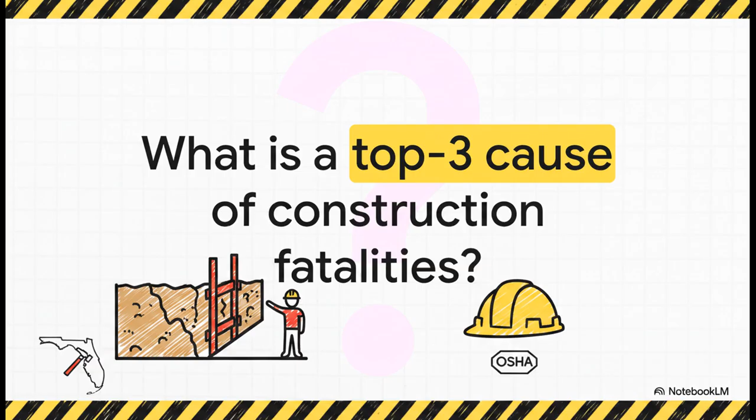But hey, before we break ground, I want you to consider this. What single event is a top 3 cause of job site fatalities and, obviously, a massive focus for OSHA enforcement? Think about it for a second. It's trench collapses. And honestly, this perfectly highlights why knowing the precise numbers behind site management isn't just about passing a test. It's literally about saving lives.

So we're going to tackle this in 5 distinct phases. We've got site layouts and plans, soils and earthwork, concrete and masonry, wood and metal framing, and finally, those absolutely crucial OSHA safety rules. Let's kick things off with Section 1, Site Layouts and Plans.

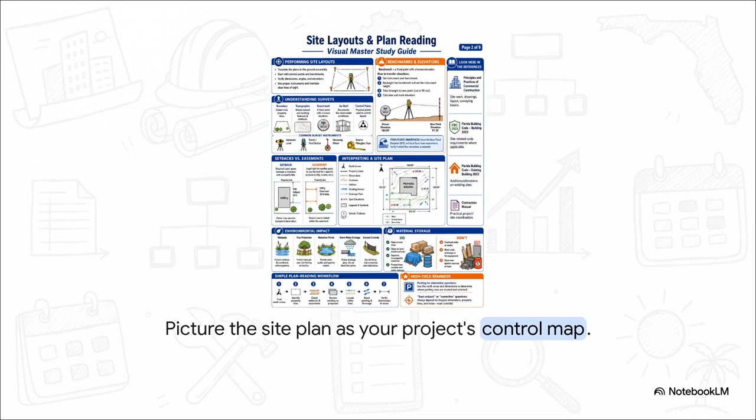Every successful project actually starts way before a shovel ever hits the dirt. Think of the site plan as your project's master control map. Being able to interpret setbacks, easements, and grading arrows, that dictates exactly where your work goes. A setback is just that required open distance from a property line, while an easement, well, that gives another party legal rights to use part of a land for things like utilities or drainage. Make a mistake here, your entire project could shift completely out of compliance.

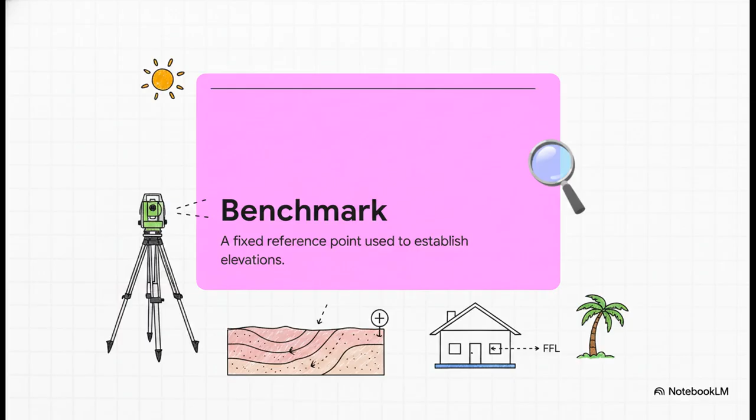Now, the absolute most crucial point on any site plan is understanding your benchmark. This is your permanent reference point, your known elevation. If you get this single elevation wrong, your entire project's elevation is completely ruined. Think about it. Every finished floor, every drainage path and grading slope relies on this one fixed point. No pressure, right? Moving right along to Section 2, Soils and Earthwork.

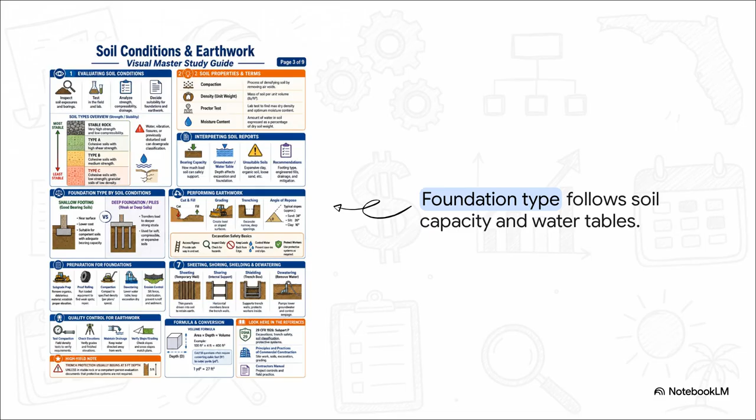So the capacity of the dirt actually dictates the foundation you're going to build on. It's a direct relationship. Especially with Florida's notoriously high water tables, soil conditions dictate everything. Got good bearing near-surface soil? Great, you can use shallow footings. But if you hit weak soils or high groundwater, which usually means heavy dewatering to keep your excavation dry, you've got to transfer those loads way deeper to stronger strata using piles. Ignoring this? That leads to settlement, cracking, and complete foundation failure. We definitely don't want that.

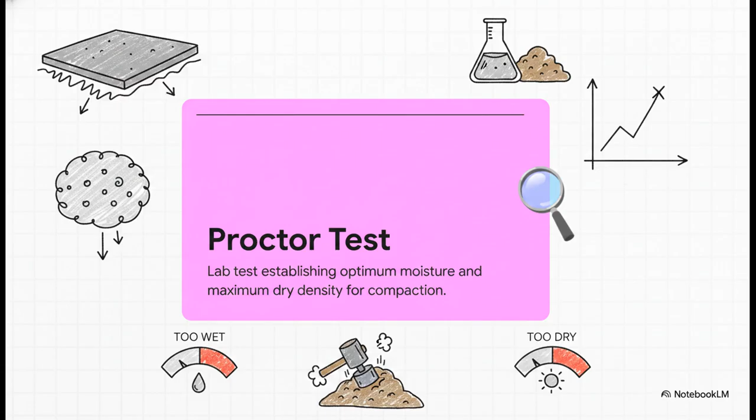To prevent that shiny new slab from settling or cracking, you have to compact the soil, right? You got to get those air voids out. But how do you actually know when you're done? Well, you rely on the Proctor test. This is a lab test that gives you the exact optimum moisture and maximum dry density targets. So when you're out there sweating in the field, your compaction efforts are constantly being measured against this lab-tested Proctor target. If it's too wet or too dry, your compaction just fails. Simple as that.

And hey, when you're estimating earthwork, please avoid this classic trap. You always have to distinguish between the loose volume of dirt you just dug up, that's the loose cubic yard, or LCY, versus the compacted volume you're placing back down, the compacted cubic yard, or CCY. Remember, dirt swells when you dig it up, and it shrinks when you compact it. Those two volumes are literally never identical. Don't let that catch you off guard.

All right, Section 3, Concrete and Masonry. With our site properly compacted, it's finally time to pour the foundation and go vertical. Now remember, fresh concrete is a live load hazard. You absolutely must follow this strict sequence: plan, deliver, place, consolidate, finish, and cure. It's non-negotiable. Your formwork and shoring have to resist immense lateral pressure during placement before that concrete even starts to cure. If you rush the consolidation or mess up the curing process, which is all about moisture retention and temperature control, your entire structure is compromised.

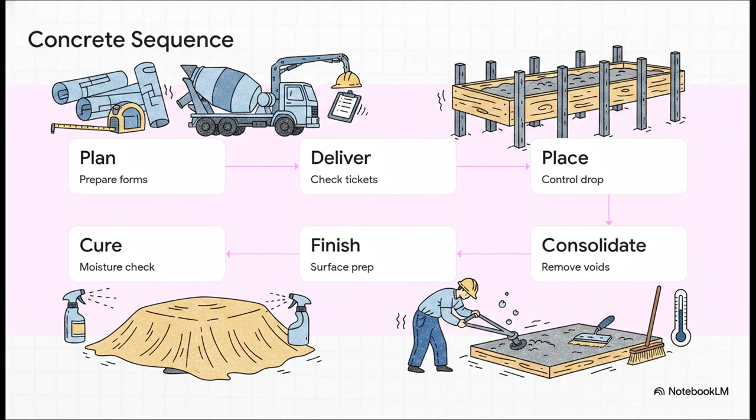And while we're on the topic of placing concrete, here is a highly tested rule for you. Fresh concrete must never free fall more than 3 feet. That's about 1 meter. If it drops further than that into a form, the heavy aggregates will literally separate right out from the paste, completely ruining the mix. So you've got to use chutes or tremies for those deeper pours to control that drop. Now, when we transition from pouring concrete to stacking masonry blocks, do not confuse your materials.

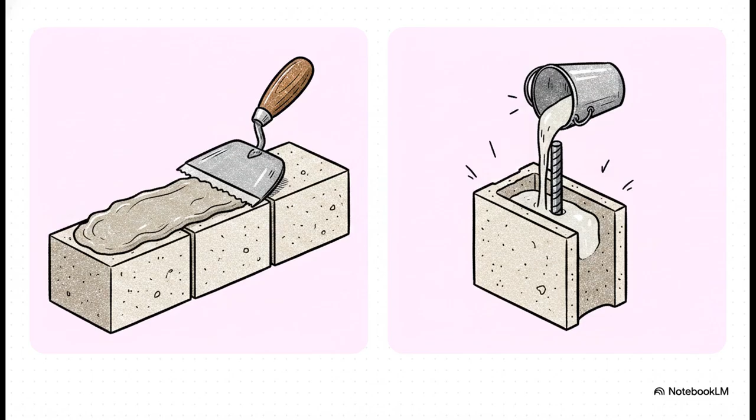It's an easy mistake, but a big one. Mortar is what actually glues and bonds those masonry units together. Grout, on the other hand, is a highly fluid material. It gets poured into the inner cavities or cells of the blocks to surround and lock in that steel rebar. So yeah, they look similar, but they serve completely different structural purposes.

Next up, Section 4, Wood and Metal Framing. Okay, now we're ready to really build out the skeleton of this structure. Take pre-engineered metal buildings, or PEMs. These are manufactured designed systems, and they require incredibly tight coordination. I'm talking anchor bolts, temporary bracing, MEP penetrations. Every single thing has to align perfectly during erection.

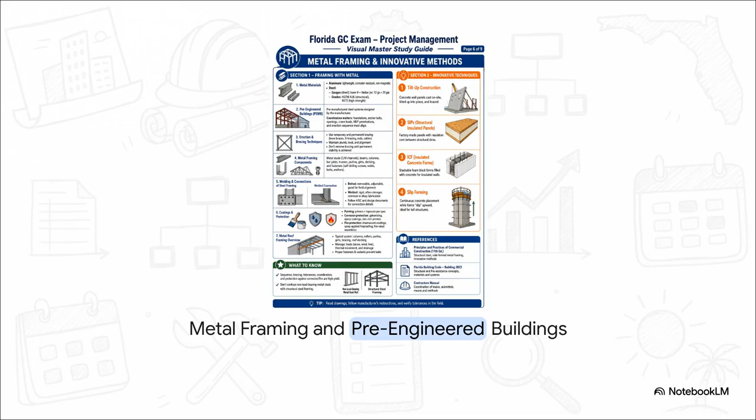And here's the kicker. You absolutely cannot remove any temporary bracing, like knee braces or cables, until the permanent stability of the frame is 100% achieved. No shortcuts. When you're ordering cold-formed steel framing or metal decking, you've got to remember this kind of counterintuitive rule. Gauge is the metal thickness designation, right? But a lower gauge number actually gives you a thicker, stronger piece of metal. It feels backwards, I know, but a 12-gauge piece of steel is significantly thicker than a 20-gauge. Keep that straight in your head.

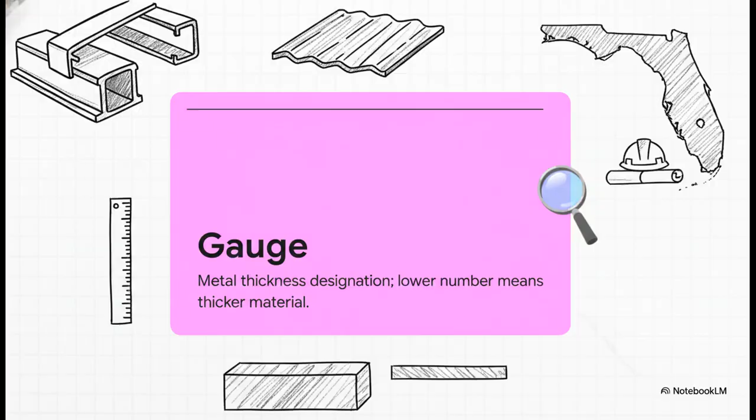Now for wood structures, the logic shifts just a bit. You have to establish a continuous load path that transfers forces from the roof all the way down straight into the soil. In a place like Florida, this means using hurricane ties between the roof framing and the walls to fight off severe wind uplift. Oh, and a huge rule here, strict truss handling. Never, and I mean never, alter, cut, or modify engineered roof trusses without official authorization from the building designer.

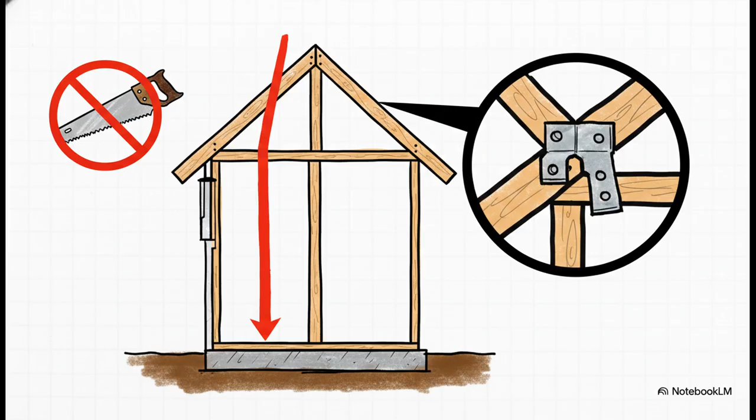Just don't do it. And finally, Section 5, Crucial OSHA Safety Rules. So, we've built a structure, but honestly, none of that matters if the job site gets shut down, or worse, someone gets hurt. Think back to that opening question about fatalities, right? Well, the magic number for excavation safety is 5. Any trench that is 5 feet deep or more absolutely requires a protective system to prevent a lethal cave-in. The only exception? If you're digging entirely in stable rock, which, let's be real, is incredibly rare.

Egress is just as critical here. If your workers are down in a trench that's at least 4 feet deep, they can never be more than 25 feet of lateral travel away from a ladder, a ramp, or a stairway to get out safely. 25 feet, that's the limit. And remember, all those spoil piles, the dirt you just dug out, they have to be kept at least 2 feet back from the very edge of the trench.

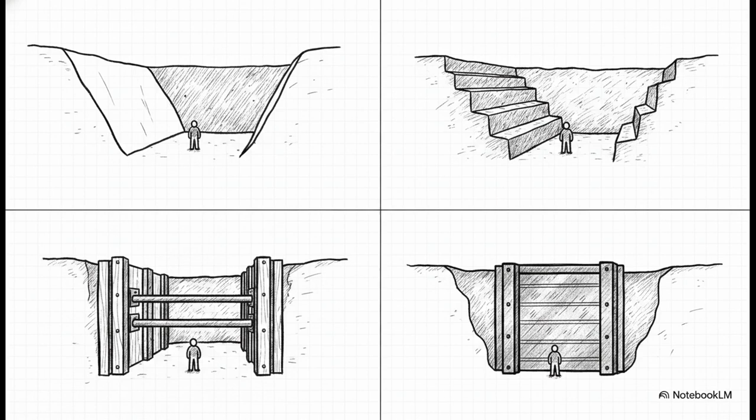To actually secure that trench, a designated, competent person on your site has to evaluate the hazards daily and choose one of 4 main protection methods. You can slope the sides back, you can bench them into steps, you can shore up the walls with internal supports, or you can use a shield, like a heavy trench box, to protect the workers inside just in case the soil decides to move.

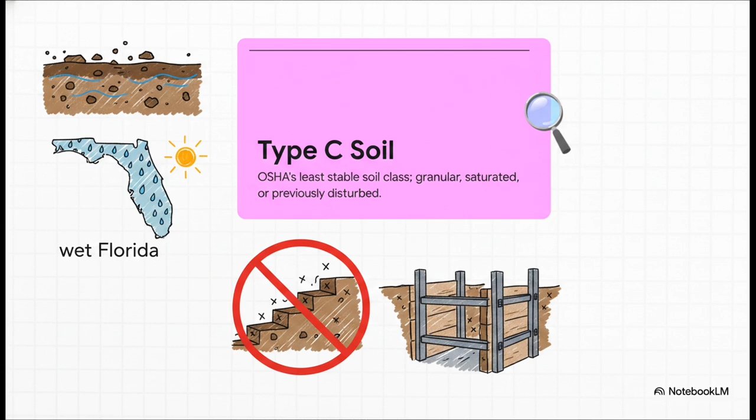Now, the protection method you choose depends heavily on the soil type, and if you're digging in type C soil, which happens to be OSHA's least stable class, covering granular, saturated, or previously disturbed dirt, very common in wet Florida, you need to know this for sure. The benching method is strictly prohibited. Why? Because the soil is literally just too weak to hold a stepped shape.

Okay, finally, before we wrap up, I want you to keep this math cheat code handy for the exam and honestly for the field too. To calculate the exact cubic yards you need for your concrete pours or earthwork fill, always take your total volume in cubic feet and just divide it by 27. There are exactly 27 cubic feet in 1 cubic yard. Remembering this simple little conversion is going to save you from making massive ordering errors.

So just look at everything we've covered today. By truly understanding the why behind these codes, from benchmarks to trench boxes, you now have the blueprint to manage critical operations. You aren't just memorizing numbers to pass an exam. You're taking on the real responsibility of keeping your crew alive. Armed with these rules, what hidden hazards will you spot on your very next site walk?